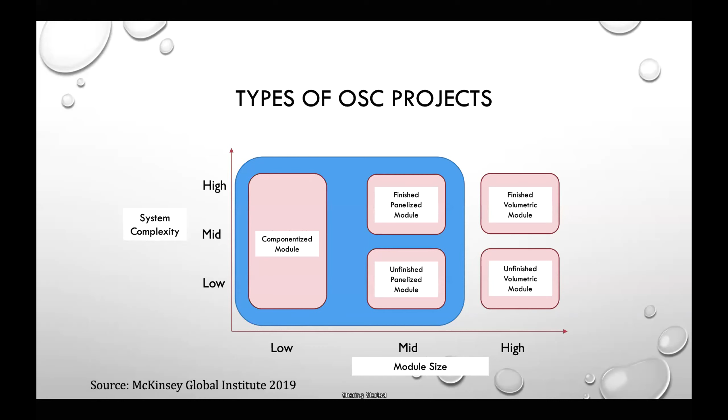Contractually, however, most commercial contracts do not charge on order variability, the changes of delivery due after the order is made. Those delivery due changes mostly come from contractors' lack of plan reliability. Such order variability leads to increased inventory cost or contractors' delay cost. Since the risk of order variability is transferred to suppliers contractually, it does not motivate the contractor to improve plan reliability. This is a story that motivates our research.

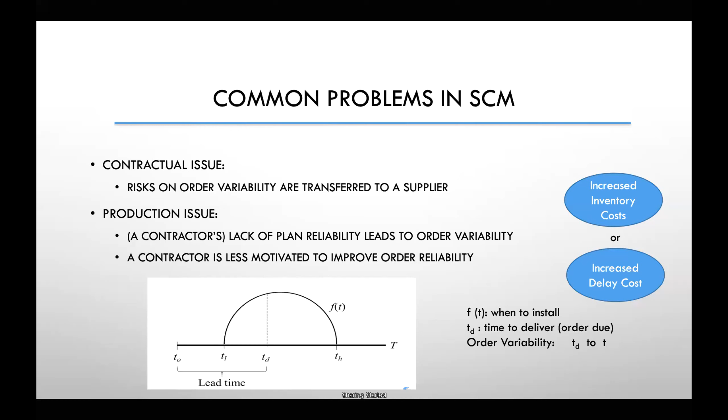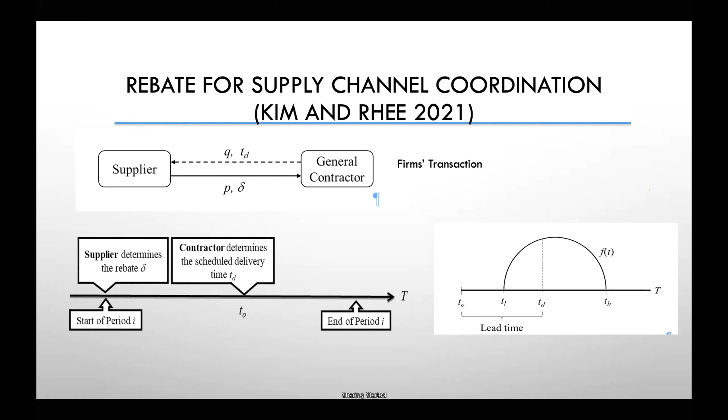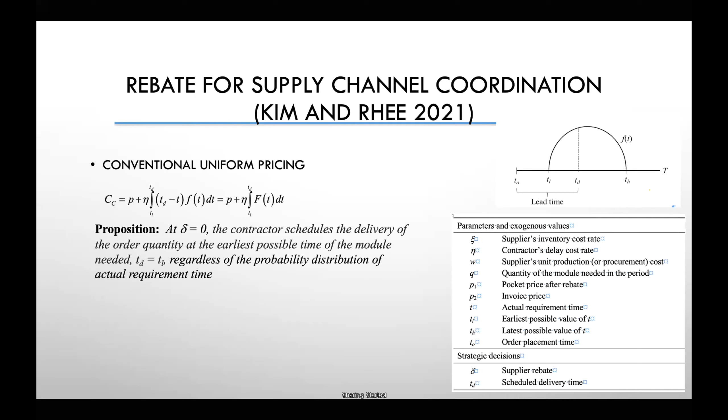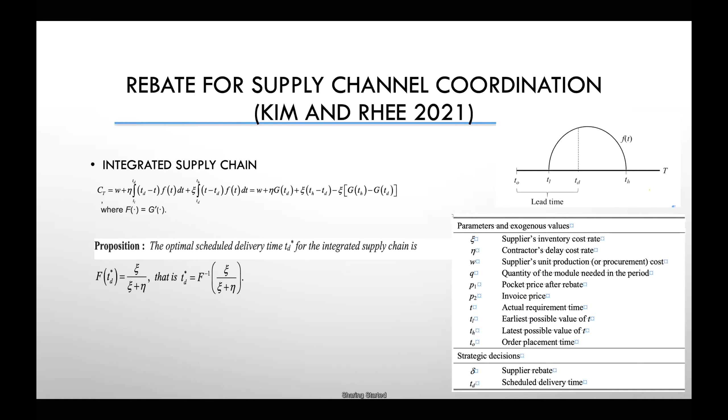Therefore, we should devise a way to motivate a contractor to behave like that in an integrated supply chain, even in a decentralized supply chain. So we set a rebate delta and rebate to a contractor when a contractor does not change order delivery due.

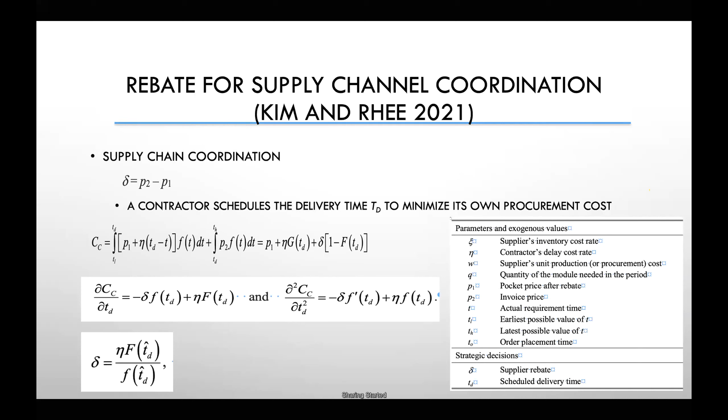Okay. So what is new and why is it important research? In this research, we take order reliability as a function with distribution. We also develop a contractual tool to motivate a contractor to reduce plan variability. Now we are developing a case study in different distribution scenarios.

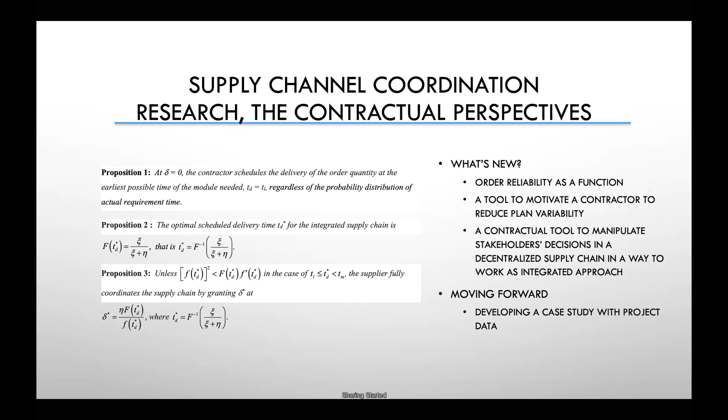Okay. Then the other approach, the second approach to this same issue, is the production approach, not the contractual approach. In this research, we want to develop a tool for production scheduling to have minimum impact of order variability. For this approach, we have used several techniques. We have used optimization technique, we have used dispatching rules, we have used recently machine learning, especially Q-learning technique. Today, I want to share one of our research works, a research with dispatching rule.

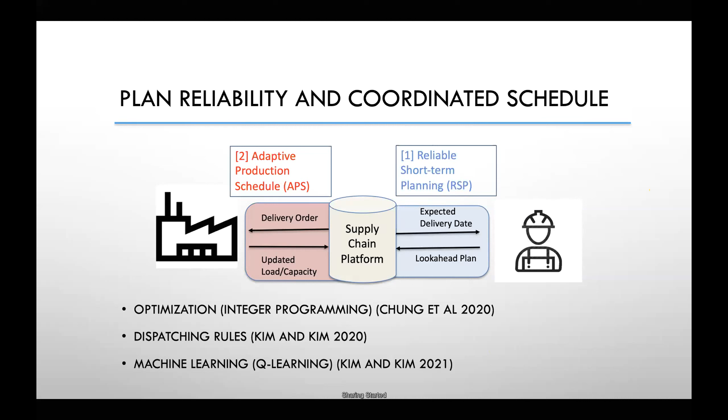Most small fabricators should develop a schedule in a way to minimize their resources. However, many small fabricators have limited resources, not enough to develop robust scheduling or optimization responding to order variability. So they use dispatching rules in practice in most cases because of their simplicity.

There are three popular rules in the industry. The first and the most popular rule is EDD, earliest due date. Under the EDD rule, a production system chooses the next job having the earliest due date. The second rule is SPT, shortest processing time, which chooses the next job having the shortest processing time. The next one is critical ratio, in which the next job is chosen considering the available time divided by the total remaining processing time of the job.

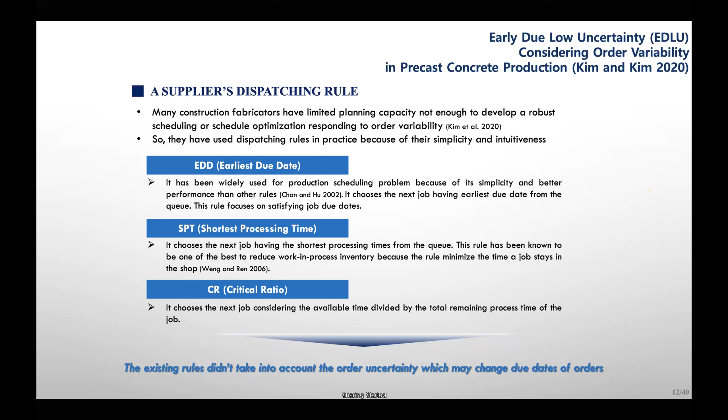These three are all popular among fabricators, but the EDD rule is the most prevalent rule in the industry. However, all of them do not take into account the order variability, which changes due dates of orders due to lack of plan reliability of contractors. So to consider a contractor's order variability that is related to his planning reliability, we propose a new rule of EDLU, early due and low uncertainty.

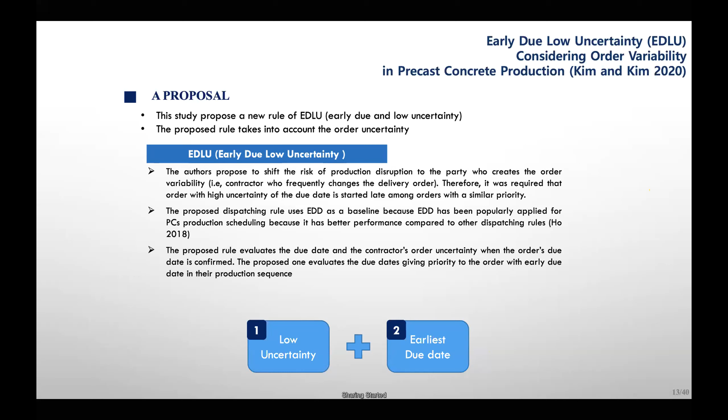In the new rule, we shift the risk of production disruption to a contractor who frequently changes the delivery order. Therefore, orders with high due date uncertainty start late. In other words, the proposed rule incentivizes a contractor to increase their order reliability. To test our proposed rule, we developed an algorithm called DPPSM, Dynamic Prefabricated Product Scheduling Model. DPPSM consists of two parts. The first part is a due date uncertainty generator. The second part is a production scheduling system.

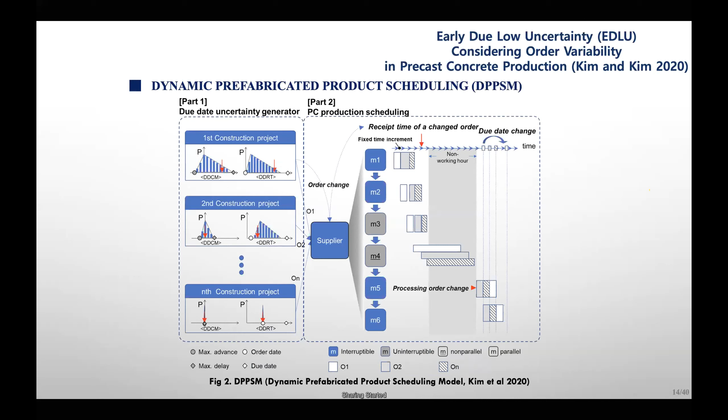In our simulation experiments, we made several assumptions in our scenario. There were 15 orders in total. Each order has a different level of order variability. For example, job number 5 has more order variability than job number 1 or 2. And we run the simulation and see in each case which scheduling algorithm gives the best result.

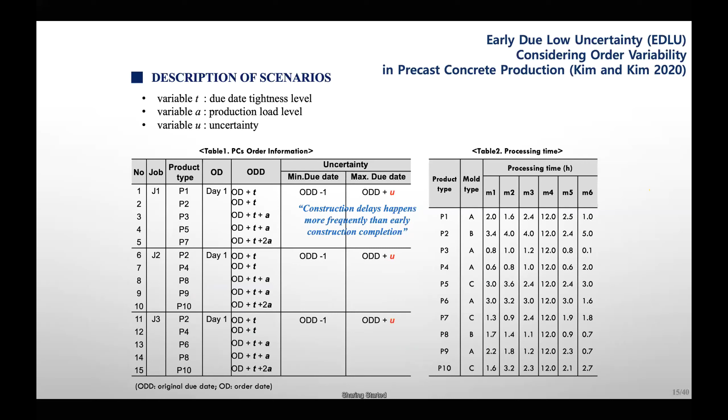This table shows the result, and the table shows EDLU, our proposed rule, gives better performance in most scenarios. The next best one is EDD, but in the case of scenarios with tight due dates between orders, SPT was the best rule, showing the lowest tardiness.

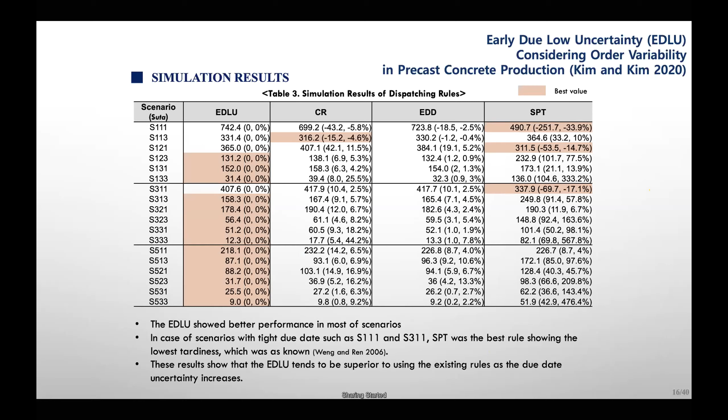In light of lean construction principles, the simulation results suggest two issues. The first one is order variability leads to variance of prefabricated product delivery. The EDLU rule is more effective than traditional rules when order variability increases. It also motivates a contractor to improve his plan reliability, such as PPC or PCR.

And finally, this study assumed the due date uncertainty has a uniform distribution. We will conduct further study to verify the effectiveness of the proposed model with the distribution shape of uncertainty from actual construction projects, and we are working on that now.

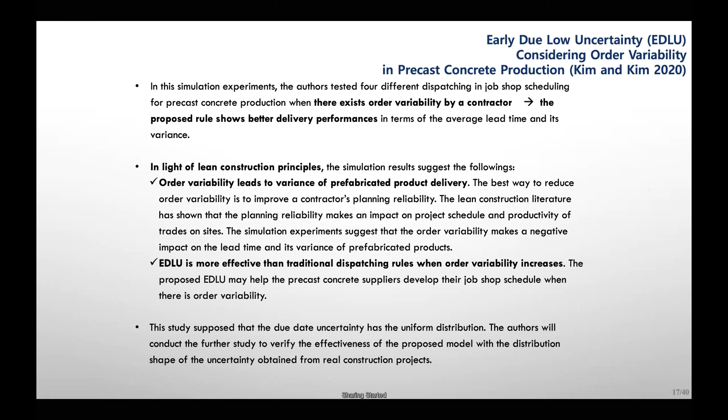Okay, so in today's presentation, I showed you two different approaches to managing a supply chain in which order variability is critical in coordination. A rebate method is from a contractual perspective, and a scheduling method is from a production perspective. In both cases, it is critical to measure and study the function of order variability to advance our industry.